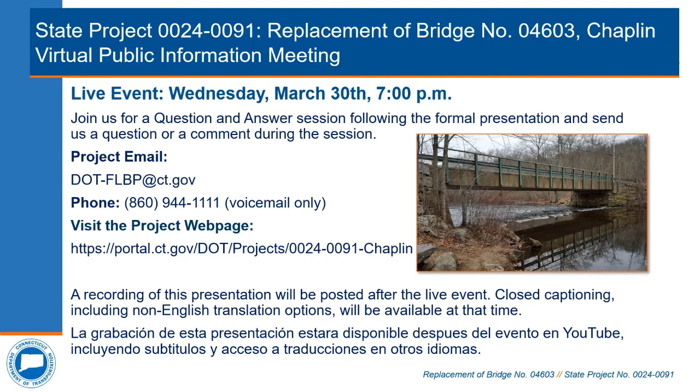for attending this public informational meeting for State Project number 24-91, replacement of bridge number 04603, located on England Road over Natchaug River. My name is Preeti Bardwaj, and I am the project manager assigned to this project.

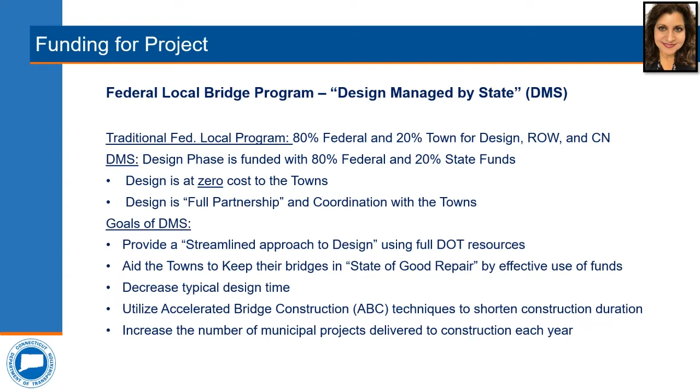Good evening. This is Juan Roman, and I'm Chaplin's first selectman. The town of Chaplin is excited to have partnered with the Department of Transportation and the engineering firm of Close, Jensen, and Miller on the federal local bridge program, design managed by state, for the England Road Bridge replacement. Thank you, and enjoy the presentation.

I would now like to introduce the project team. I am Preeti Bardwaj, project manager. To my left are Mr. Bart Sweeney, Division Chief of Bridges, and Mr. Lou Baccio, Principal Engineer. To my right is Mr. James Barrows, Project Engineer. We also have Mr. Dennis McDonald, our Rights-of-Way Coordinator. The consultant liaison engineers are Close Jensen and Miller, and from CJM we have Mr. Mike Brady, Project Manager, and Mr. Chris Zabidio, Project Engineer.

So, ladies and gentlemen, we are almost ready to present the technical portion of the presentation, and you will be hearing a lot of bridge lingo throughout. Therefore, I am about to give you a 2-minute crash course on some of the structural components of a bridge and the numerical condition rating system assigned to a bridge.

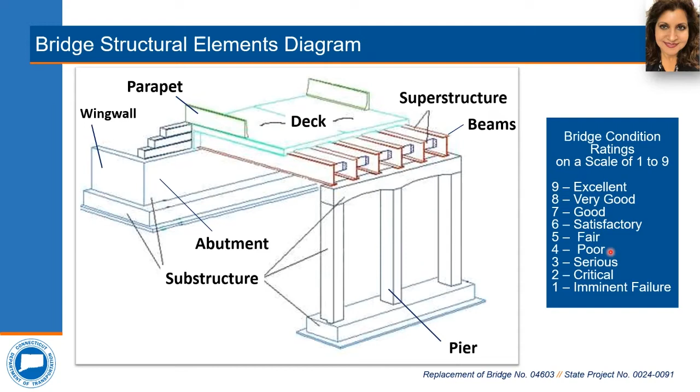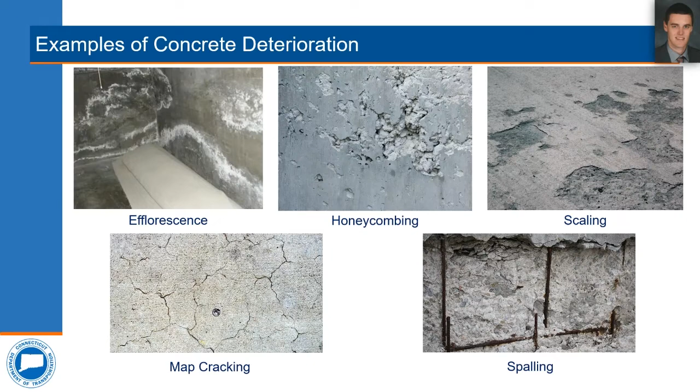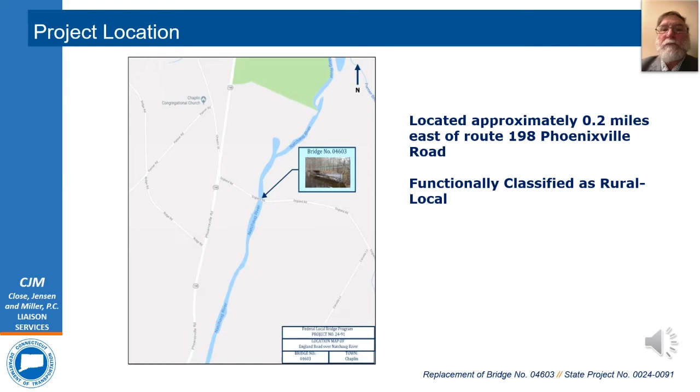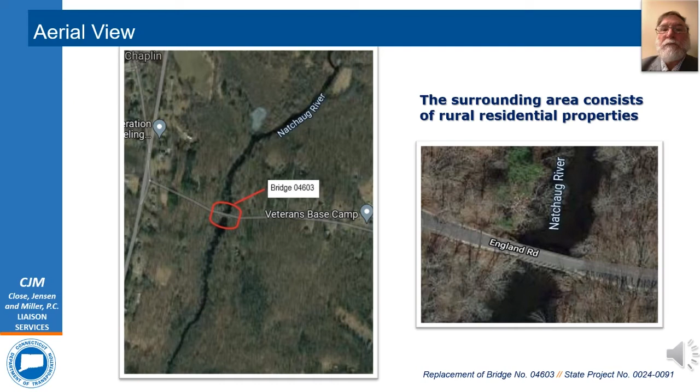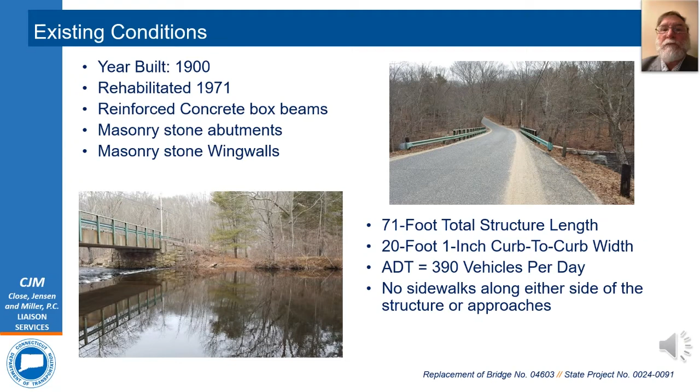Existing conditions: this bridge was built around 1900 and was rehabilitated in 1971. It is made of reinforced concrete box beams with masonry stone abutments and wing walls. It is 71 feet long with a 20-foot 1-inch curb-to-curb width and serves 390 vehicles per day, and does not have sidewalks.

Utility conditions: all utilities are overhead. They span the structure on the south, the downstream side. There is a drainage pipe outlet near the northwest wing wall. There are no underground utilities spanning the structure.

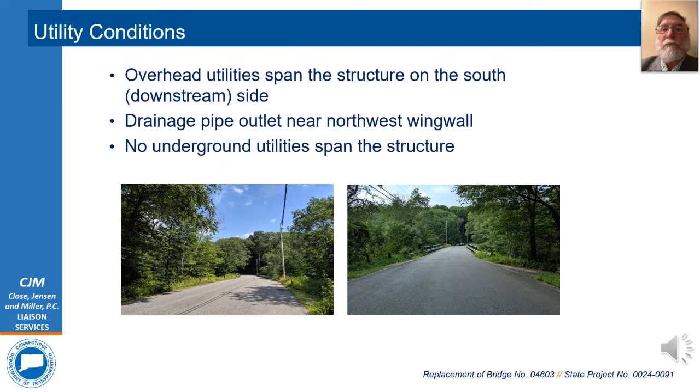The deck is in satisfactory condition, rated a 6, with typical cracking: random transverse, diagonal, and longitudinal cracks. The approaches exhibit the same moderate wear and cracking. The approach rating is 6, satisfactory condition.

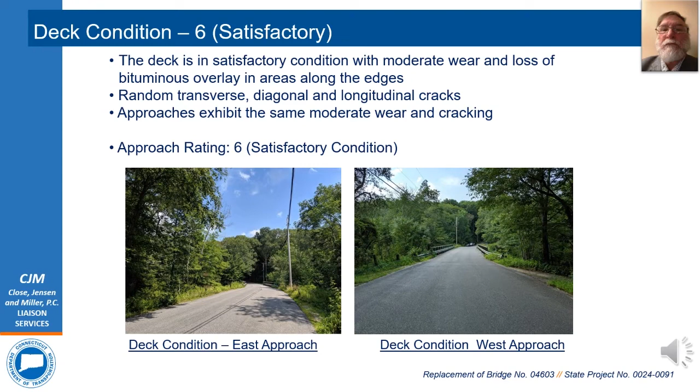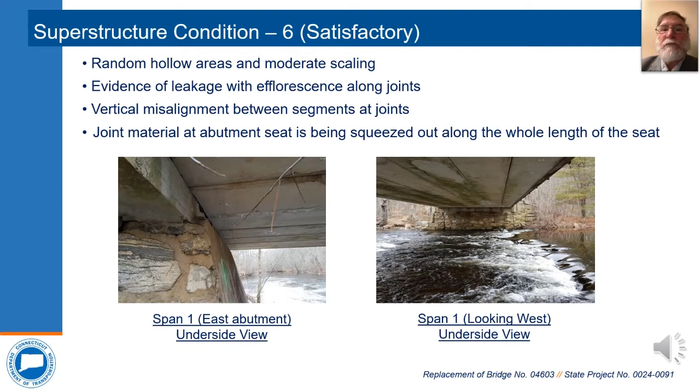Superstructure condition is 6, satisfactory. Box beams exhibit areas of light scale and honeycombing, areas of heavy efflorescence and stalactites, and heavy leakage between the box beams. There are also a few areas of spalling exposing the reinforcing steel, and the beams are vertically misaligned. Efflorescence is an indicator of how much water is leaking through the bridge deck and whether the waterproofing to protect the concrete needs to be repaired.

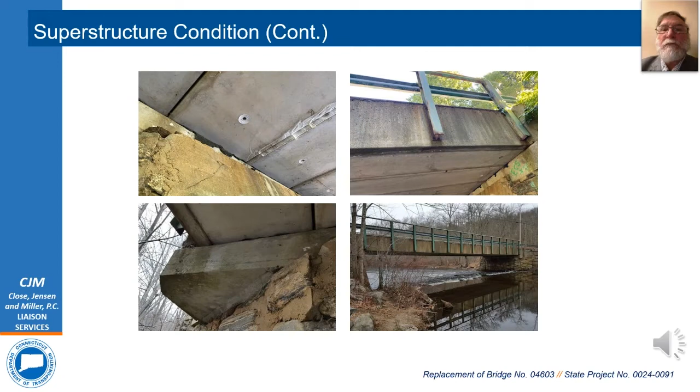These are additional photos of the superstructure showing the efflorescence, the leakage, and misalignment of the longitudinal joints.

Continuing on with the substructure, rated 6, satisfactory: the stone abutments are missing grout and some stones, and the footings are exposed, exhibiting moderate scale along the waterline.

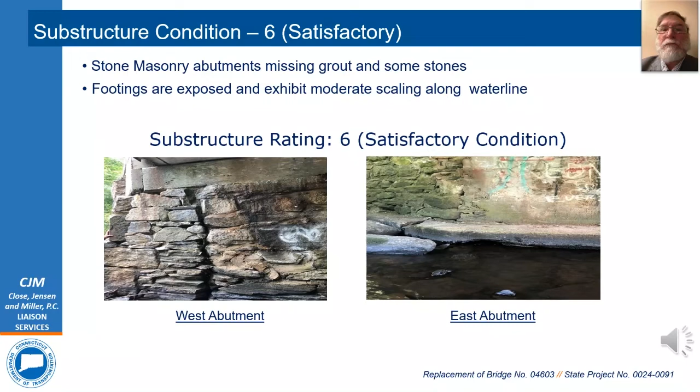Channel and scour conditions: the channel rates 6, satisfactory. However, the scour rating is 3, scour critical. Scour critical means that a severe storm can erode below the abutment footings, possibly collapsing the structure, and that's the reason for replacement. The channel is relatively narrow for the volume of water conveyed during such a storm, but is otherwise stable.

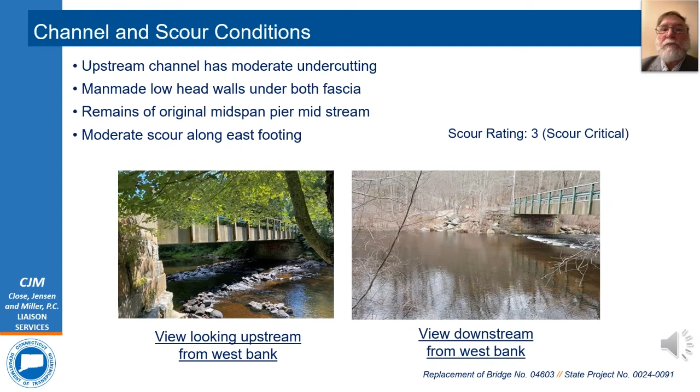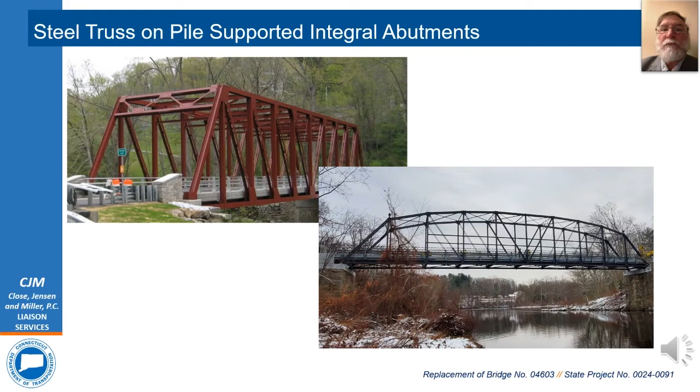These photos are of 2 recent local bridge projects. The one on the left is similar to our proposed bridge here. The other is a historic bridge that was reconstructed in Canton, shown as an example of a truss. In the photo on the left, you can see the bridge rail system and the end blocks discussed earlier.

We are replacing the bridge in its current location with a longer span, reconstructing the road about 50 feet each side beyond the approaches, adding a crash-tested rail system on both the bridge and each end, as well as repairing the access to the pull-off access to the river.

The existing bridge is 21 feet wide, and we are proposing a 28-foot curb-to-curb width to match the approach roadway, which will improve vehicle safety. The new roadway is comprised of 12-foot travel lanes, one in each direction, and 2-foot shoulders. This will also provide a safer pedestrian walkway.

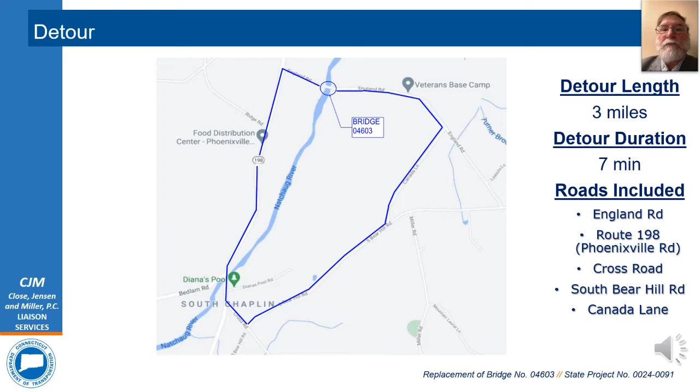We anticipate 3 permits for this project. The first will be your local inland wetlands permit that we will present to the Chaplin Inland Wetlands Board. We will also obtain an Army Corps of Engineers permit that will be specifically determined during final design. And we anticipate a flood management certification through the DOT.

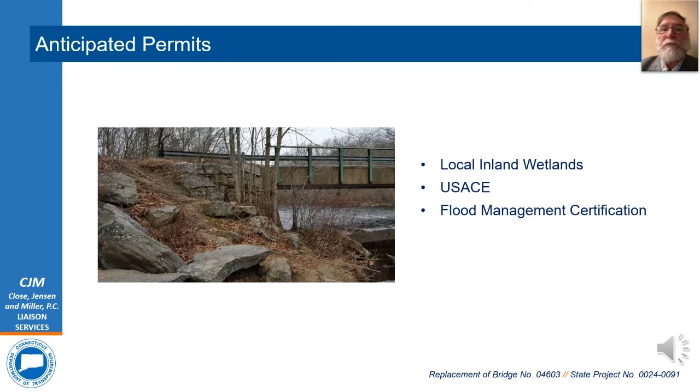The anticipated schedule is a construction duration of approximately 8 months, anticipating starting in spring of 2024. It is 80% federal funds, 20% municipal funds. Estimated cost is $3,920,000. The municipality share is $784,000.

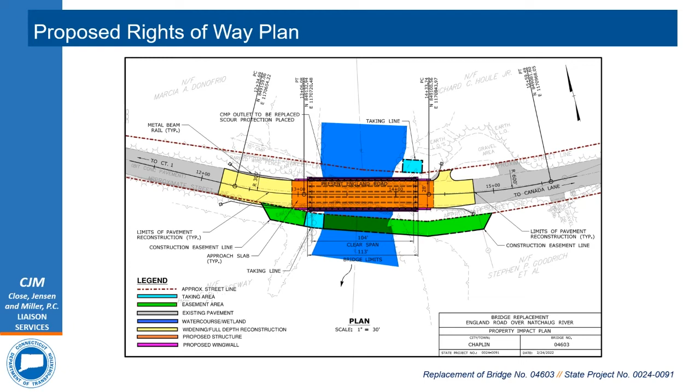This is Dennis McDonald from DOT Rights of Way. The area shown in green there, just to reiterate, are construction easements. Construction easements are temporary in nature. The state will acquire the easement for the duration of the project, and once the project's complete, the easements will be extinguished.

Why can't we use precast beams and no steel skeleton? CJM? Chris again. The reason we went with the truss is the alternates that would work on a structure this long raise the road by over 2 feet, which is a tremendous burden hydraulically, environmentally, and a few other aspects we probably don't want to get into, such as permitting through FEMA and such. In order to get a bridge to cross this span and meet the hydraulic requirements without raising the road, we needed something with a thinner cross section, which brings us to the truss solution.

That gives us the shallowest depth of road cross section in order to cross this lengthened hydraulic opening.

Another question from Jim. Will there be a sidewalk on the downriver side? Chris, if you could take a look. Chris again. We had a conversation with the town about sidewalks. Sidewalks are not in the plan of conservation development for this area, so we did not include sidewalks. We did widen the bridge substantially so that pedestrian safety was a consideration, but no formal sidewalks, just shoulders and wider travel lanes.

Question came in from Anonymous. Will there still be access to the river, kayaks, fishing, etc.? Chris again: absolutely.

Another question from Jim. What class bridge is it? Class 40 or greater? Jim, if you could expand on that, are you referring to the load carrying capacity of the bridge, or are you referring to something different, the steel weight? If you could possibly elaborate in the chat.

While we're waiting on that, another question came in from Dick: when does the town need to have the funds by?

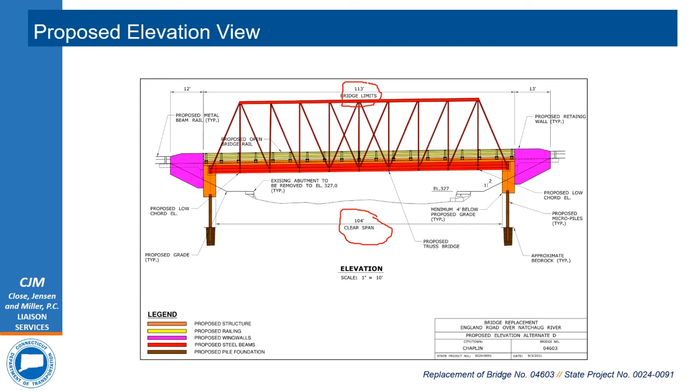Okay, thank you, Chris. I see chat coming from Jim. Maybe just to elaborate a little bit, we specified an HL93 loading. Maybe we can, Mike or Chris, get into how many tons that is on an HL93.

Yeah, Mark, I'll have to look up the specific amounts to that. I don't know that off the top of my head, but like I said, it will be able to handle any kind of heavy traffic or vehicular loads that would include any kind of permit. Thank you, Mike, I can provide that tonnage at a later time.

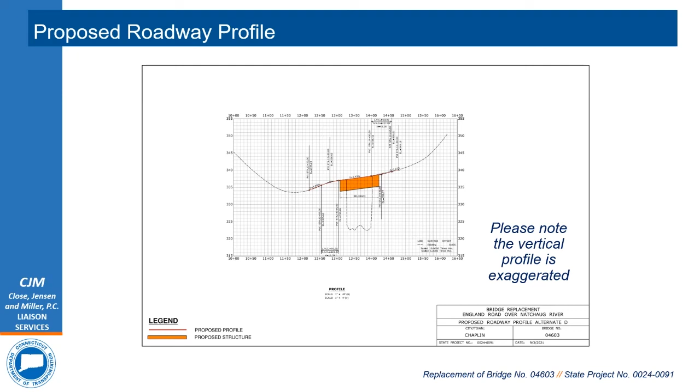This is Mike Brady. I'd also like to add that in this visual, you can see where we'll be working on the roadway. Any roadway improvements in that area will have an appropriate normal crown and be sloped appropriately so there won't be any low points on the road to catch water near the bridge project. So in short, yes, it will address any rain runoff in the vicinity of the bridge that you may currently witness as a ponding condition, or anything that could cause a treacherous situation during snow melt or heavy rain.

Great, thank you, Mike.

A question has come in from Guy: will there be any penalties for construction overtime? This is Mike Brady. Yes, when we develop the contract that will be advertised for this project, there will be liquidated damages stated clearly in the contract. The contractor will be notified of how many calendar days they have to complete the project, and if they're still on site working past that determined amount of calendar days, liquidated damages will be applied.

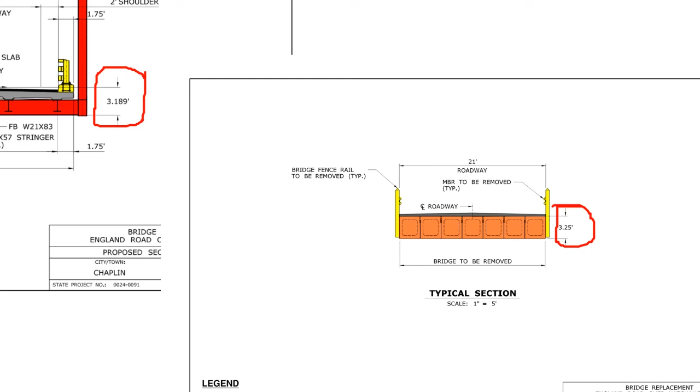Raising that roadway about 2 feet introduces a lot of fill into the floodplain, which touches on what Chris was speaking about earlier, with a larger quantified square footage of environmental impacts that will occur. Additionally, we will more than likely have to delay the project due to a much more rigorous permitting effort to get this project ready to go.